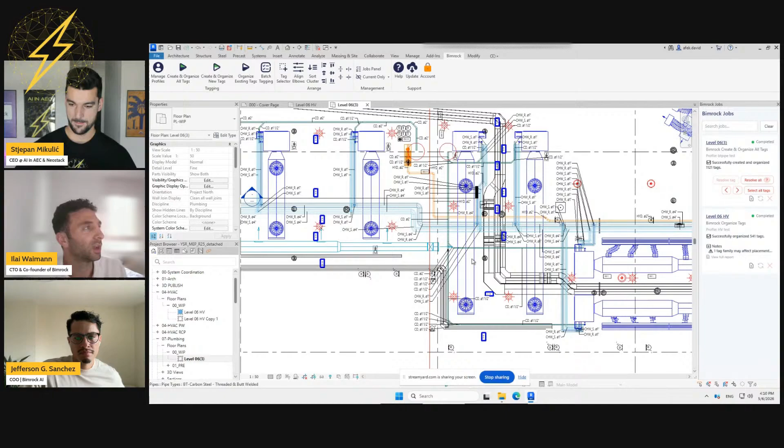So this is one floor that I just tagged now with AutoTag. This is 1,121 tags, and it took just over 2 minutes. And here's another floor also that I just tagged, a little tidier and with slightly more space here.

One thing to note here is that we have the duct tags, and we try to place the tags inside the ducts, for example, but if there's not enough space in the duct, we can sort of pull them out automatically.

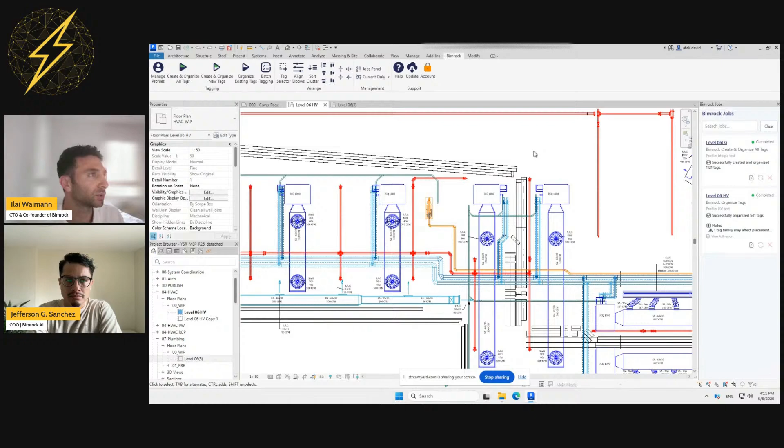Now if I just hit Control Z over here, the tags should jump back to where they were before this tagging job was run. I might have to hit Control Z again. Oh, there you go. Okay, now the tags will jump back to where they were.

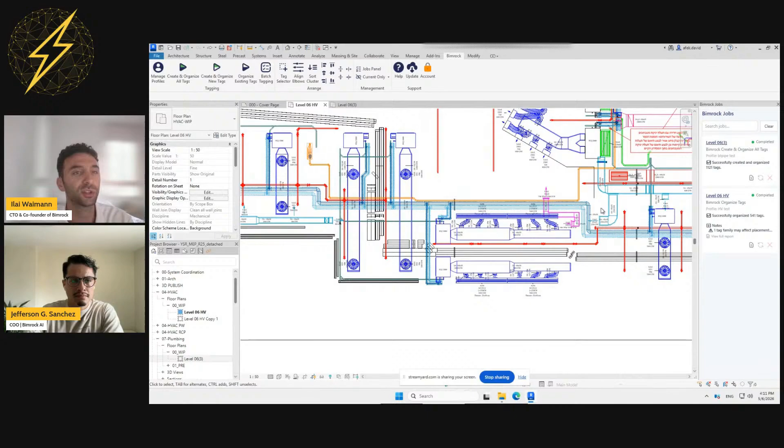I don't know if this is very familiar to some of the engineers or not, but what we see here is a lot of tags. Some of them, things move during the project, and tags and elements move around, so some are nicely placed by the engineer, and then you add some stuff, so maybe there are tags that are not as nicely placed, and some of them are overlapping.

This is a real project of some of our design partners, and we can see that some of the tags are overlapping each other. Some of them can't really be seen. So we're in this situation where we have a floor plan and a bunch of tags, and we want to improve their location.

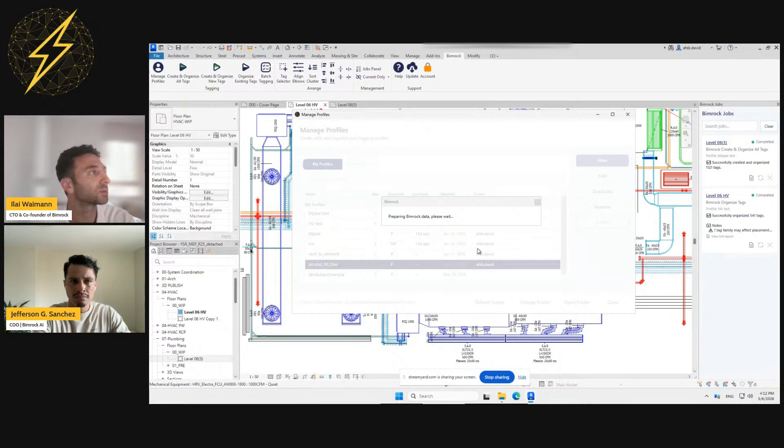So I go to manage profiles. Let's start here with this button, manage profiles. Here are some of the tests I did. If I just do new, we have this little interface, we can just click OK, but it's just to save some time. We only load things from the view, but we can load everything from the model as well. And we load the linked model too.

Now on the left we have all the tags. An important point to stress here: these are tags. If I click ducts, these are tags that are loaded within your model, the user's model in Revit—the user's own tags that are found.

Now we have a shortcut button here, add all tags from view. So what happens is we found there are 9 different tags in this view that the user, the MEP engineer, has already added. There may be a bit of a mess here, which this profile editor helps to sort of make clearer.

Why do we have 2 different duct tags? Maybe we only want this one that has 239 appearances. Maybe this is a mistake. So it also gives you a nice overall picture of what is going on in terms of tagging in this view that we just saw.

And we can already run this, but before we do, I can click one of these tags, and we have some extra filters we can apply. If I only want to tag, for example, Air Terminal—it's not so relevant. But if I go to the duct, we can decide to tag only horizontal elements, only vertical elements, or both—element types, system types, all specifically Revit things we pull directly out of your Revit model.

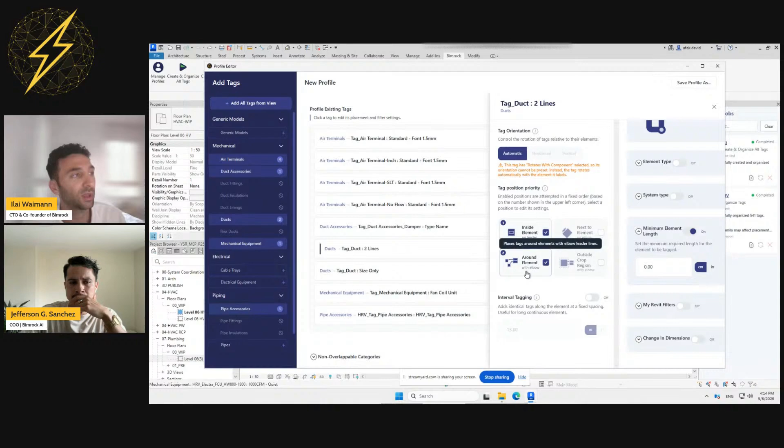And this is the main part here, inside element and then around element. So basically, we try to put the tag inside the duct. Usually ducts are large enough and they have enough space. But if there's not enough space, we pull it out, so it's not completely overlapping and hiding the duct itself. And so every one of these tags can have different settings.

We can also say, hey, I only want to tag ducts of a certain length. So it's a very powerful profile editor, which we can go into more depth perhaps later if there are more questions. But I can just save this for now. Just give it a name, HV test. Okay, yes, already exists. Fine.

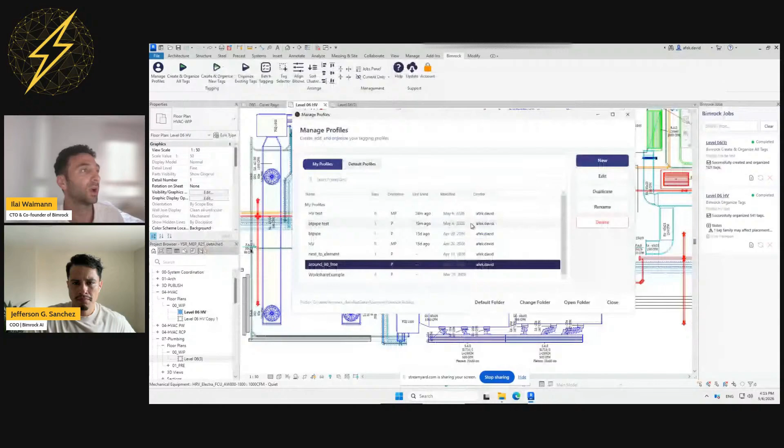Now I already have these existing tags, so we have these three AutoTag buttons. I'm going to click organize existing tags because I don't want to create tags yet. And I'll just hit it now. I just ran this earlier, so we can use the cache, which will make things slightly faster. Now it's going to run. I think it's going to take 1 minute. The server is already processing things. If there are any questions now while we're waiting, it's a good time.

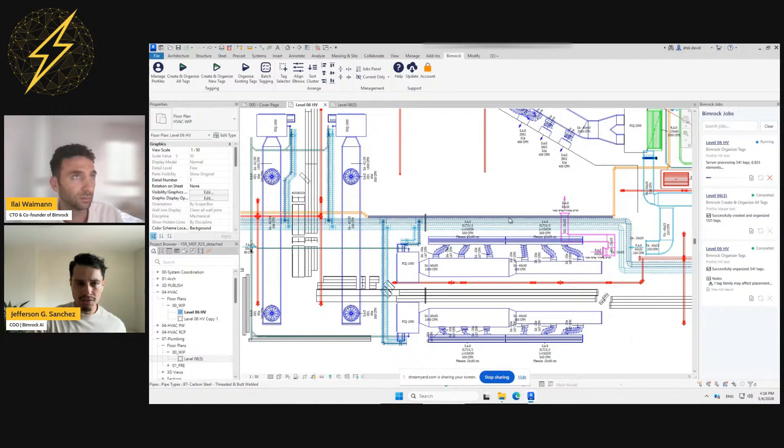Yeah, I think I'll just provide some context on the tagging tool itself. The biggest value that we've heard from our early design partners and our users is the ability to standardize your firm's profiles and logic for communicating information. At the end of the day, documentation sits at the end of the design phase for the MEP industry. It's where you're supposed to be handing off information downstream to either fabricators, teams on site, or even for internal review. And often when you use Revit's tag all button, it gives you tags, but they're all messy. They don't really follow any actual rules.

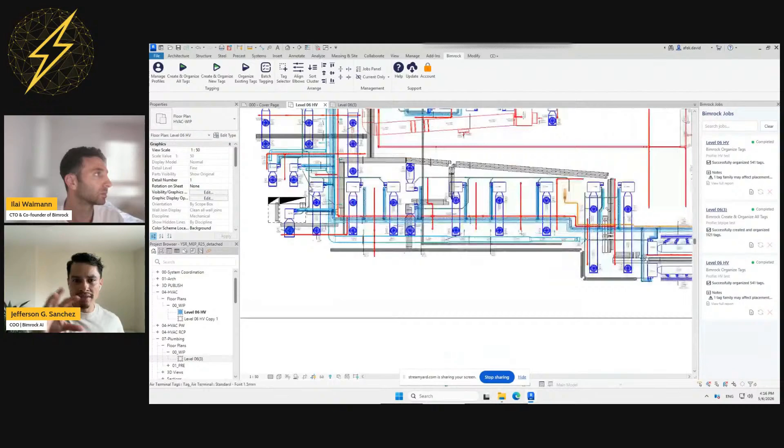And so the importance of being able to standardize and customize your profiles according to your own company's standards and have that be repeatable is where we come in. And so, yeah, I think that's just an important concept. You basically write the rule once, and that rule is applied to multiple views, multiple disciplines.

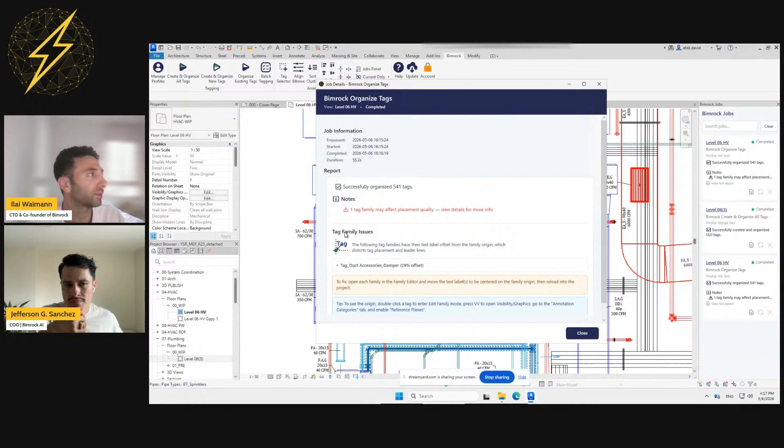Yeah. So the job just finished running. 541 tags, took just under a minute. Oh, we have this, which could be helpful: sometimes tags are not centered on their origin, which causes an offset with the leader lines. This tag is 29% offset, so you can actually find this tag and sort it out and reset it so it's straight, and its leaders are not all crooked. Now we can move on to this.

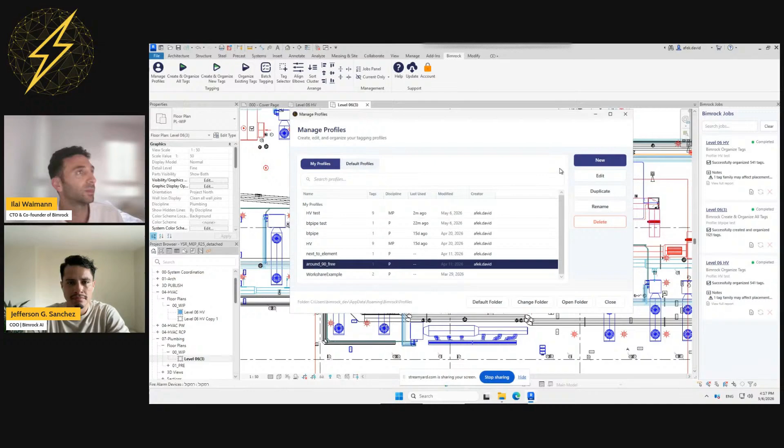Oh yeah, when I hit Control-Z, it just deleted all these tags. So say I'm starting fresh, and we have a floor plan now without any tags. So I go once again to Manage Profiles, and there are no tags on this floor. So if I do what I did before, add all tags from view, nothing happens. So instead, I'm going to go to Pipes. This is a plumbing plan, and I want to add one of these pipes, BT pipe, Imperial. Maybe I'll also add a pipe accessory.

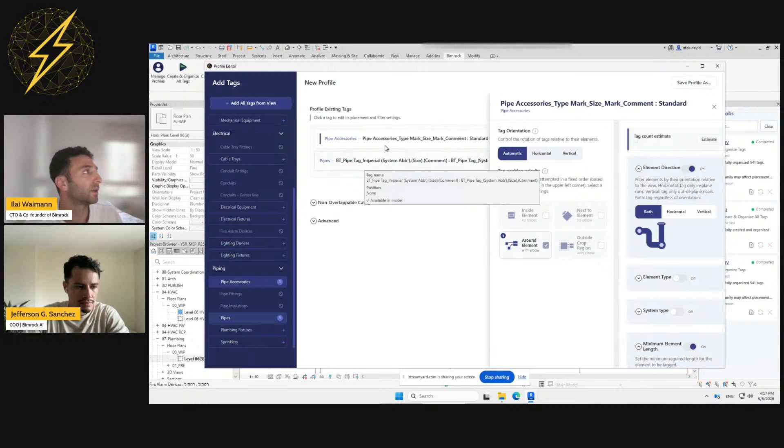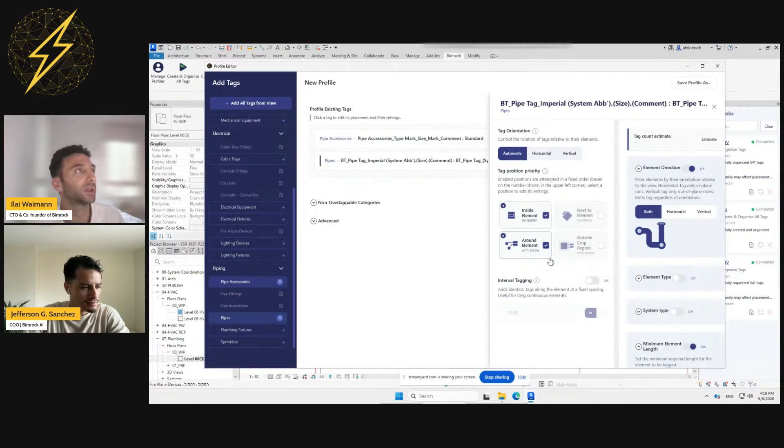Maybe for the pipe, I don't want it to tag every single pipe, maybe only pipes that are not too short. So let's start with 10 centimeters. We can also switch to inches. Now we try inside and then around, but with pipes, usually there is not enough space inside. Still, it doesn't really slow things down to keep both. I can just save profile as, call it BT pipe plus pipe accessory. Okay.

Now I'm going to hit create and organize all tags because we want to create new tags. These two will do basically the same thing, but this one is if I only want to move the newly created tags, and now we have no tags anyway. We could also use the cache just so it's slightly faster. Instead of 2 minutes, it should take 1 minute with the cache.

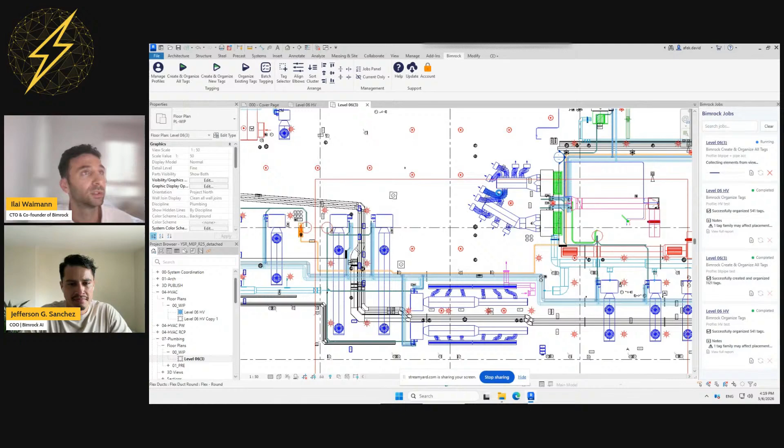Yeah, Jefferson, is there anything you want to say now?

Let's talk about the batch jobs. Let's say you've already understood how to create the profiles, and if there's any questions, we can go into more detail for all of the profile creation. But on the right side, you have the ability to batch create jobs. So it's not just one view. You can apply your logic to multiple different views and multiple different versions of what you want to present across multiple views. So as long as you queue up what you want tagged, it's this idea of being able to set it and forget it and go have a coffee or come back.

Notably, it doesn't slow down your activity in Revit. So while we have all of these automations happening in the back end, it doesn't actually slow down the work that you have in Revit. I don't know if Stjepan will eventually ask about data and processing and things like that, but there are some cool things that we are doing algorithmically to speed up the work that happens on the desktop so that we don't effectively clog up your compute for these batch jobs to happen. We can always go into those in more detail.

Yeah, we already have some questions. I see them popping up, so nice to see that as well.

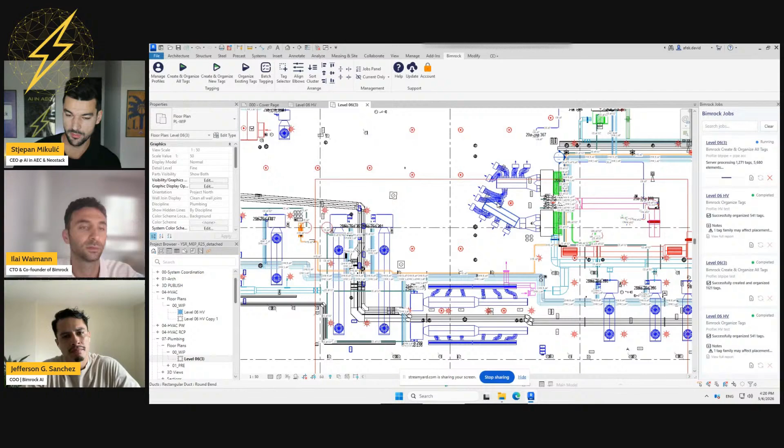I would start with the first question, because what I'm thinking of immediately is that Autodesk opened its Revit API to MCP servers and MCP connections recently. So, I know we're going to get to this question later, but don't get me wrong, why would I go with Bimrock to do this, and why wouldn't I try to do it myself with Claude or something through the MCP connection?

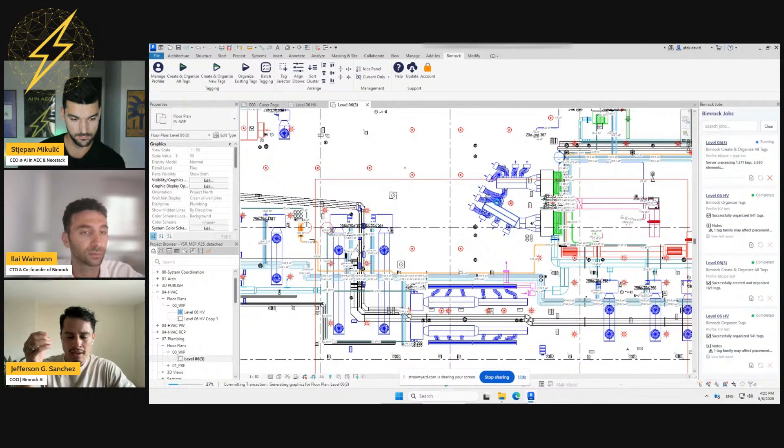Yeah, the answer that I have to that starts with an analogy. This is just personally how I see AI developing right now. When I was first experiencing CAD, this was probably mid 2000s, and spreadsheets in Excel, there was always this one guy in the office who had these really sick macros. This guy was the Excel wizard, and it was like, oh, can you send me your macro for pulling this information out and standardizing it?

That's the analogy I use right now: Claude and AI, generally speaking, increase the baseline of the tools that you can create, but we should distinguish between a commercially viable, enterprise safe, scalable, shareable tool as opposed to a macro. This isn't to discourage anyone from saying that you as an individual can probably create and understand the workflows given the Revit APIs, the open APIs we have now, and the MCP servers, but that is a very different category than a scalable, safe, private enterprise solution that you can download and share across a team of 500 people.

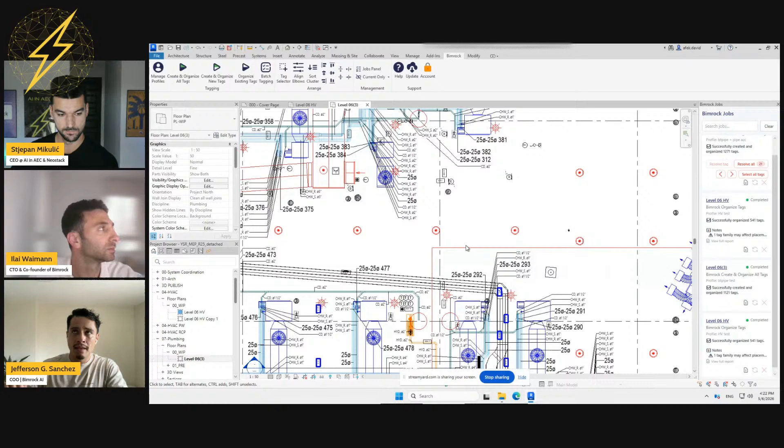So on one axis is the scalability. On another axis, it's the security that we provide. And the third angle is the customization, or the level of sophistication that we've built into this tool, that it's not simply a Revit MCP server. We have pretty sophisticated infrastructure that allows us to not slow down your computer. The fact that you can run this tag and it literally does not slow down your activity in Revit is an infrastructure choice.

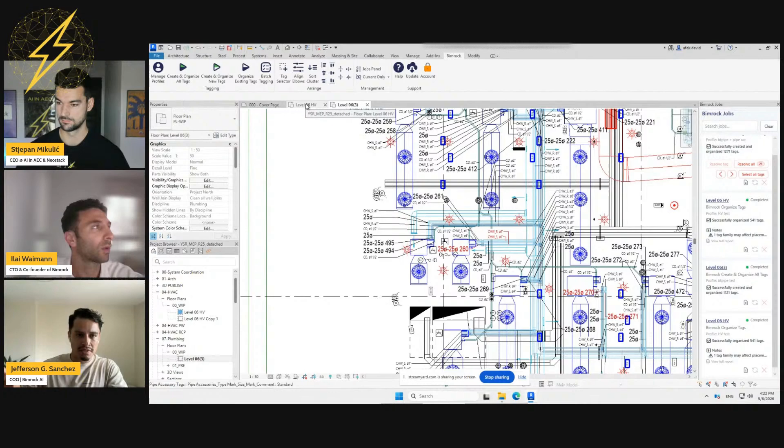So there are these different aspects that individually might be replicable using Cursor or Claude. I do this vibe coding stuff all the time, but that's very different from having an enterprise ready, secure, and scalable tool.

Okay, that's a really good answer. I fully agree, because while, as you said, the baseline moved, there's always going to be this techie person in the office who's going to be testing that, and maybe they can get something to work. But to make it scalable, stable, secure, that's still a big jump from a personal test to something that's actually working at scale.

Yeah. And we've seen the archetypes where the hacker engineer works for a team of a certain scale. So if you're a freelancer and you run your own firm and you notice the bottlenecks, but maybe your trade-off is how much time or resources, maybe you don't have the money to buy an enterprise solution, the risk reward of building it internally versus buying it makes sense for you.

But when you're an enterprise company, and maybe it's your top engineer or designer that knows the firm standards, that knows how things should and should not be tagged, that has the influence and perspective to motivate and teach other people, is their highest impact in learning to use Claude, and then learning to make this enterprise safe, and then to make it scalable, and to make it so that it doesn't slow down Revit?

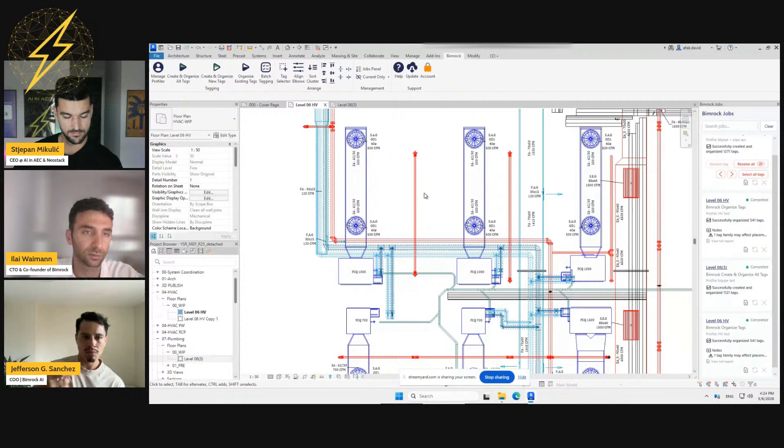It's just the risk reward or the value curve looks very differently. So then rather than taking your highest paid engineer and shifting them to vibe code a tool, that just isn't realistic. So there's always a spectrum, and I think Claude Code and these agent tools are better for the smaller scale, the individual freelancer who has a very niche workflow that they're particularly annoyed about and want to replace. But then that very quickly falls off as you start taking into account a bunch of other considerations of large scale companies. I agree.

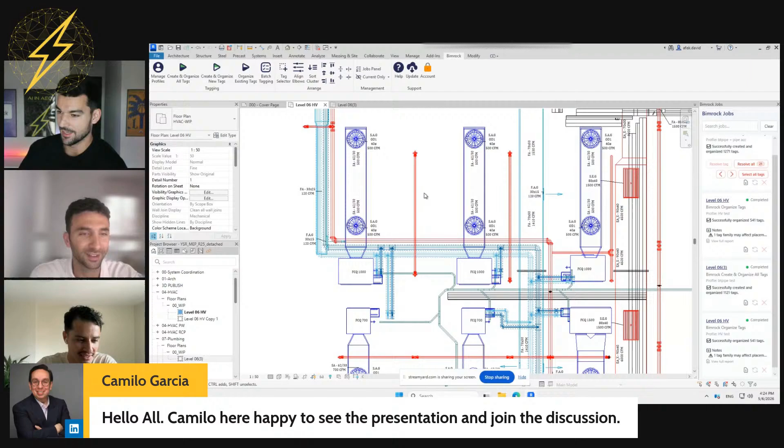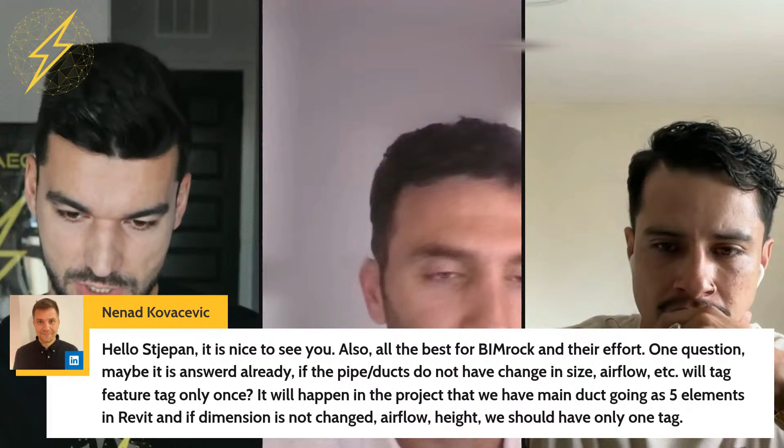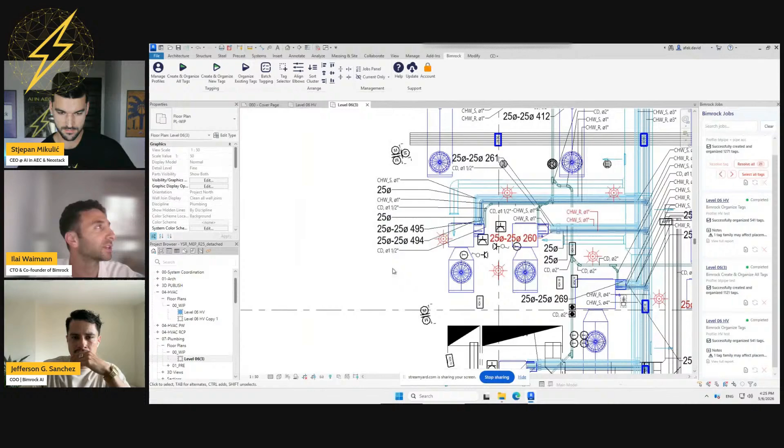Question: if the pipe and ducts do not change in size and airflow, etc., will the tag feature tag only once, or will it happen in the project? Yeah. First of all, go into that tool, go in the profile. This result is a bit funky because I didn't realize we had two very different styles of tags, so it came out a bit weird. But what we do, we cluster the tags. To answer your question, what we have in our profile editor are some filters. Say let's add these tags, but this pipe accessory tag was just.

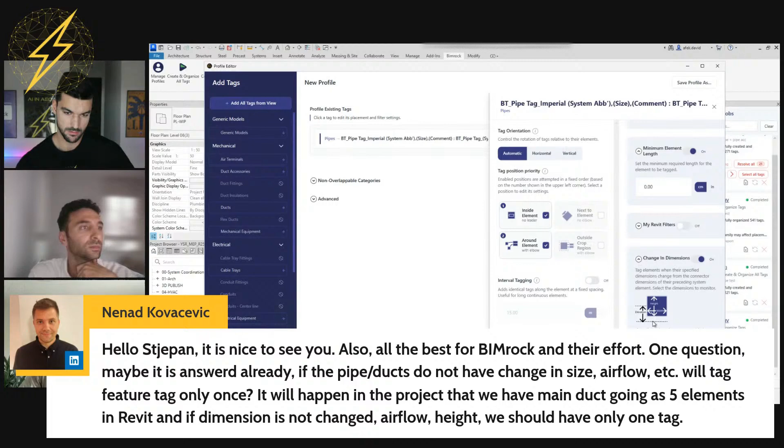I'll rephrase the question slightly if it was unclear. They were trying to ask, for a particular element, let's say it's a pipe, there's this case where properties associated to that element may or may not change. One of those could be diameter, length, material, system type, or even a curve. We know this is a recurring challenge where you want to communicate a significant system change, but not do that manually. So we break down that system change into the different categories and filters that you're able to apply for that systems change repeatedly across instances in a particular view.

So if a pipe changes from 8 centimeters to 10 centimeters, you want to be able to filter for that specific system change. Those are all expressed as customizable filters, and that's what Ilai is going through. So if things change significantly and you want to express that as a significant change, do you have that? And yes, we do. And the opposite of that: if the system doesn't change, you don't want the same tag on that view 20 to 30 different times. So we also have the inverse, where you can standardize only on the first significant change, or variables of that, like every 25 feet or every 30 feet or some length, so that logic for the repetition is ingrained in this.

Yeah. So we have different filters for different elements. If it's a duct, this is a rectangular duct. It has width, height, and elevation. For the pipes, it detects that this pipe is round, so this little icon is not relevant here, but it has a change in diameter if we want. So if I do change in diameter for the pipe, and for the duct maybe change in width, change in height, or change in elevation. All these could trigger if one of these happens, so we get a new tag.

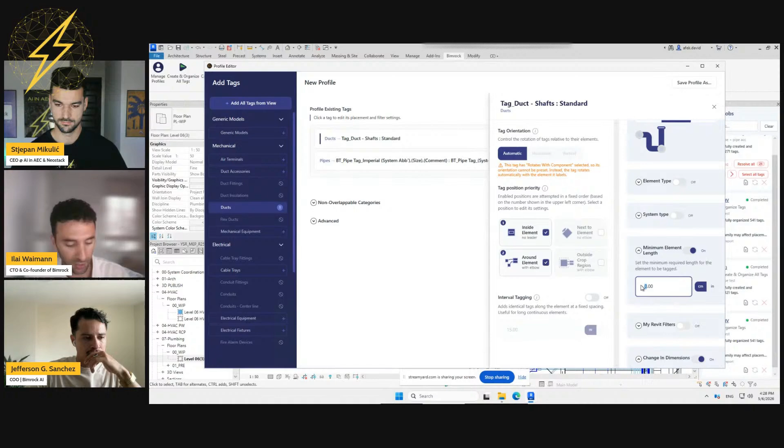And say I also want to only do horizontal ducts, only of a certain length of 10 centimeters and more, and maybe the same for the pipes, 10 centimeters. Usually I think they like it longer than that. Let's call it test demo.

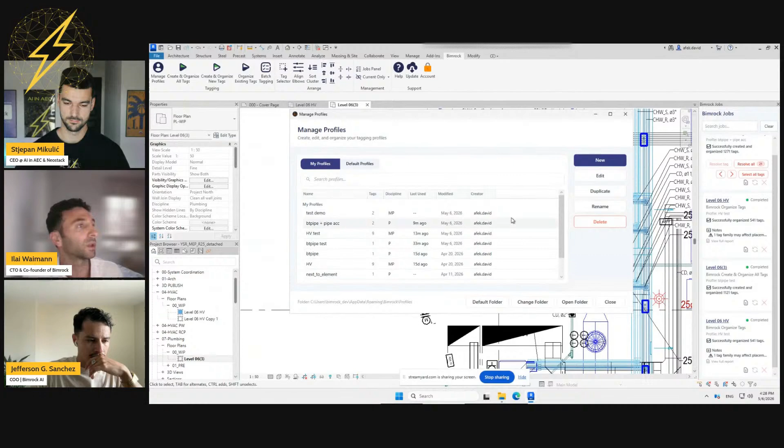Okay, now close this up. If I hit Control Z twice, the first time will just bring the tags back to where they were before we ran AutoTag. So you can always recover your work. Then the second Control Z will remove the tags because we created all these tags earlier. And now I'll run the profile again. Test demo. Let's use the cache for speed.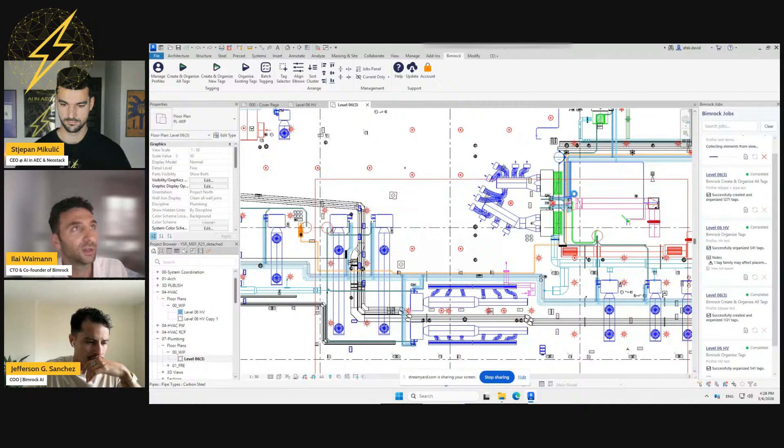Yeah, and now it should. And while we wait, maybe we can cover another thing as well. Yeah, I see the questions popping up already. Nena is also saying great and bravo.

Okay, yes, we have Nirvan here. It says LinkedIn user on the live call, but I know it's Nirvan. I was checking the LinkedIn as well. Does this tag, AutoTag, share a total quantity count for equipment? Do you work with HVAC distributors, and their biggest time sink is doing takeoffs?

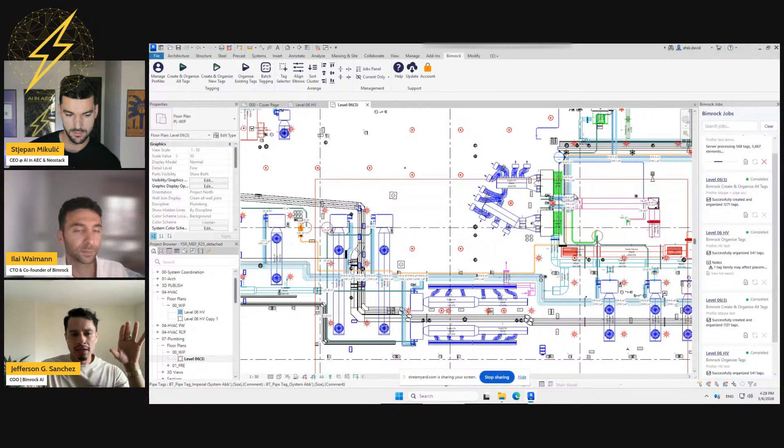So I'll take this question, because his question is implying if we serve a different type of ICP or a different use case. So I'll frame it by saying Bimrock right now is effectively a tool for a BIM designer, engineer, modeler, someone working at a consultancy, consulting engineer, a specialty contractor, or an internal BIM team at a large general contractor.

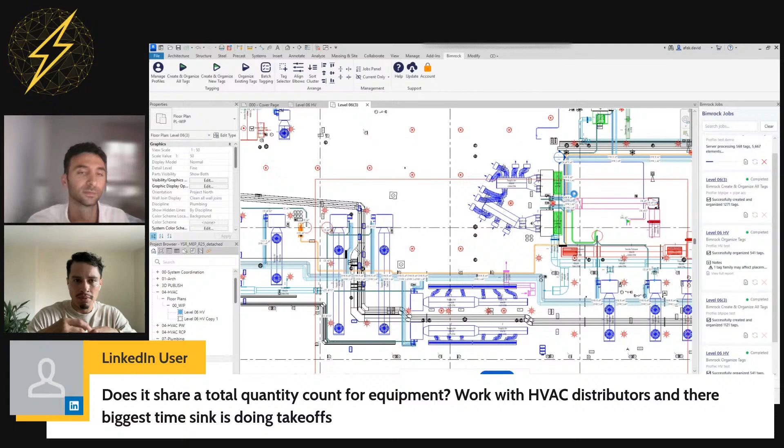We do not currently serve nor plan to serve distributors or folks in the extended supply chain. Even if the overlap of the problem is similar, we're very much focused on the workflows for the MEP designers, modelers, and engineers. So as an aside, does that mean some of these elements might be useful for other people? Yes, but we're not explicitly supporting them on our roadmap.

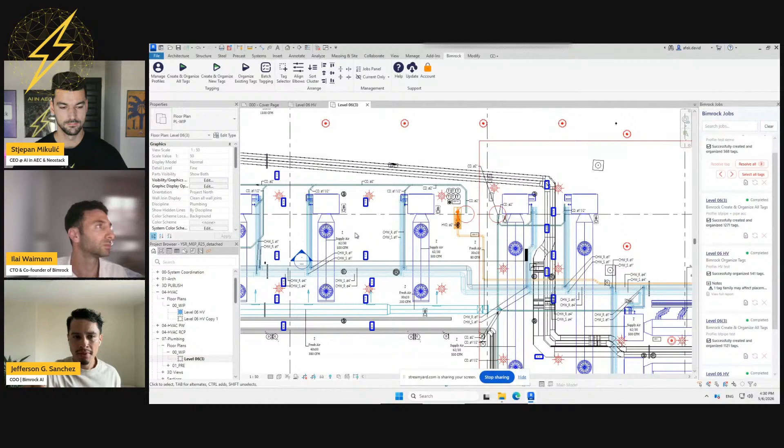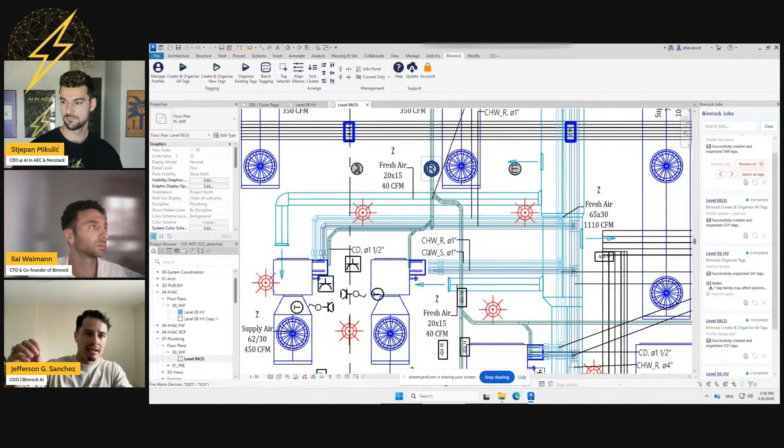So the ability to count tags or count numbers of things is a feature we have, because when you tag something in Revit, the logic behind it asks what type of thing you are tagging, and based on that type, how many instances of that thing you have. And we have a running list, because we need to feed it to the algorithms to say these are the tags that correspond to this Revit element type, and then position them in the white space on the model. So we have it implicitly, but it's not an explicit feature for fabricators or people in the supply chain to help with the takeoff process.

That being said, we can create a template where it specifically tags a specific element that is maybe useful for that distributor or person in the supply chain. Like you only want to tag the SKU, if that's a property you have in the Revit model, for particular HVAC diffusers, so that when you look at that plan, you only see the diffusers that match this logic and that SKU, which makes it easier for you to count.

But we don't take that a step further and say, here is a deduplicated single unified list of the schedule for that particular HVAC diffuser, so you can go look in your inventory and map that. That slightly extends the workflow of the customer we're looking to focus on. Nice, thank you.

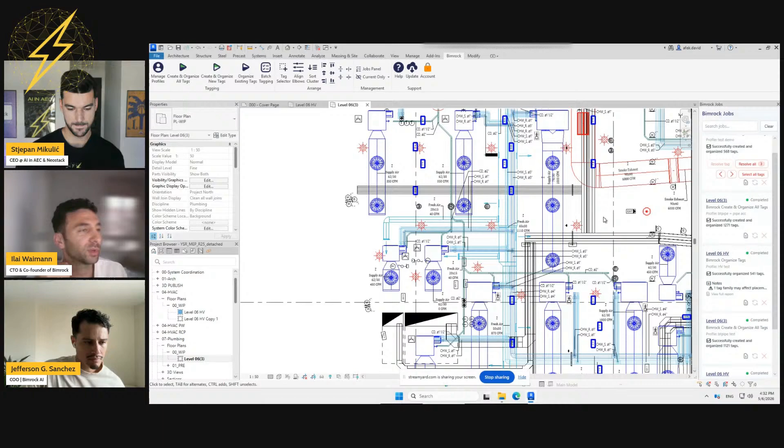Yeah, so here are some results. We can see there are a lot fewer tags because we applied these filters, which are very good to use, because then you have a clearer picture of what's going on. You have fewer tags, so they are less in the way of one another. And this is basically the result. It is never perfect, but what we try to do is find the white spaces that are closest to the elements and place the tags there.

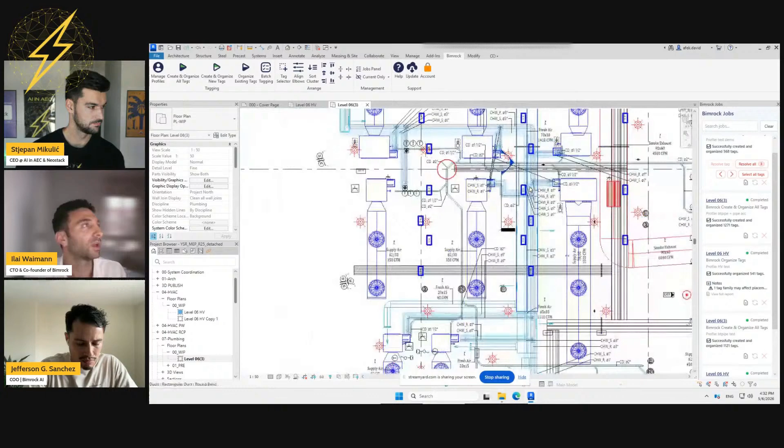Sometimes in groups. This is a cluster of tags, if the elements they tag are close together. This one jumped quite far away, which is a shame, but sometimes it's difficult with all the things going on, and it tries to find the best result and give you a good head start for the project.

Okay, nice. Yeah, you guys tell me, what should we do? Do you want to continue if you have more things to show, or continue with questions? Yeah, Ilai, you kind of run. I can show one thing.

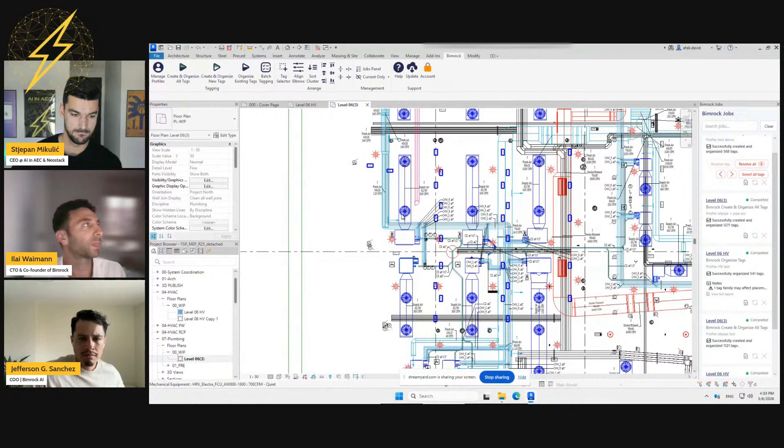Jefferson mentioned the batch tagging, where if you have a lot of profiles, or one profile you want to run on many different views, you can have this sort of shortcut. And another thing is this sort cluster button.

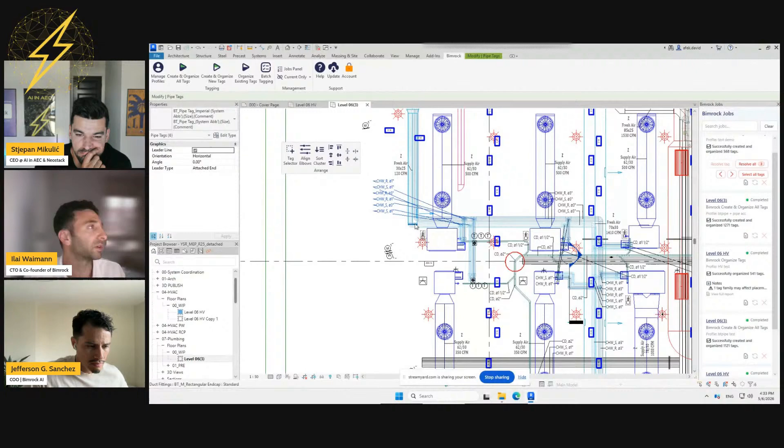So if I have this cluster of tags and I just grab them, it's actually easier if we pull these buttons down, and I can do tag selector also. So it just selects the tags. Then I want to have them here, for example. I think it's better if they're here. So then I can hit sort cluster, and nice. It switches the order. It's a fast, easy tool to use.

Then you also have align elbows, and if I want to align the elbows, maybe space out the tags a little bit. Maybe also add this guy to the cluster, and then hit sort cluster again. Space it out. I don't know. Align left. By the way, align left, align right. These tools have been added, I think in Revit 2026 now. You can work with these, but before that, these are helpful.

This is really cool. But maybe because we're also waiting on Revit right now, there was a question from Cassandra here. What happens if Revit freezes or crashes during the tagging process? Does this cause an issue with the plugin? Does the process start from the beginning again upon restart?

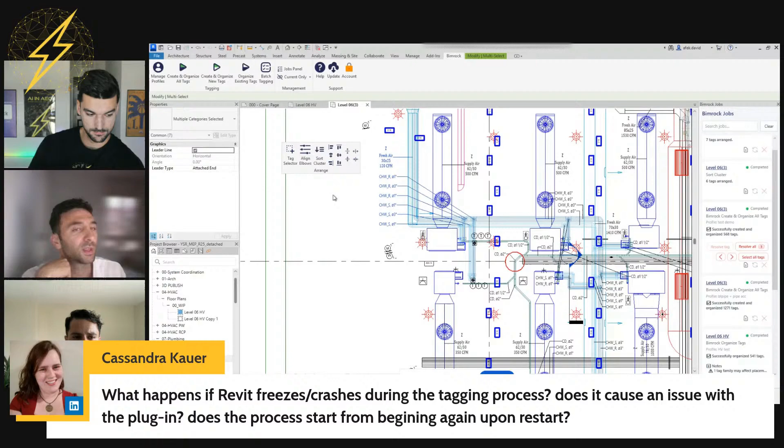Yeah, you'd have to run the program again, because we put a lot of effort into making sure that we don't crash Revit, right? That is the worst thing to do, and obviously we put in a lot of safeguards around our own software so that we do not interfere with a lot of very basic things Revit does. But if Revit crashes for some other reason, or you close Revit before the job is done, the job is lost because the request returns from the server, but it doesn't find the client. So you just have to run it again, but it's no big deal.

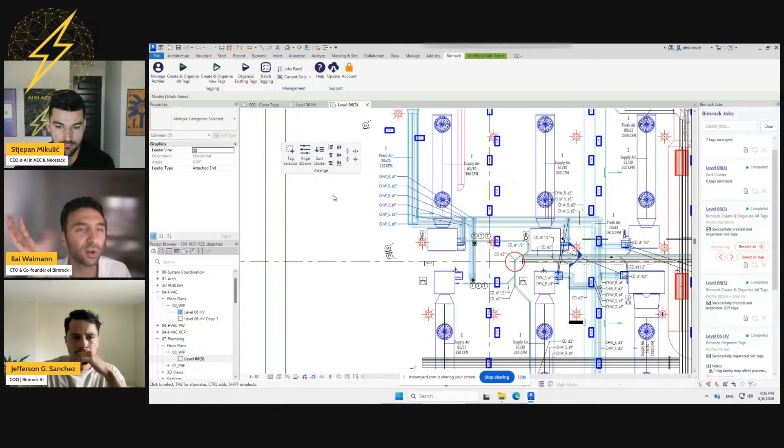You won't be in a situation where something is stuck or frozen because it's waiting for a job to come. We just say, okay, the job did not arrive. There's a timeout, and it's fine.

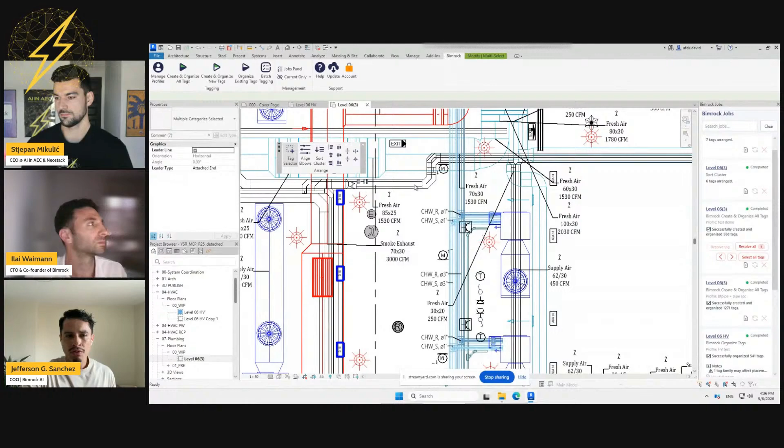Yeah, maybe tying it specifically to the pain point or the use case of someone who'd be like, oh my God, I pressed the button, I expected it to be done, and I came back and it didn't happen. So within the range of actual possibilities, if you're running a single job or a smaller job, it's on the order of 0 to 1 or 2 minutes. So if something crashes, it's as simple as pressing the button to run the automation again. But because you already have the profile logic set, you're not redoing anything other than pressing a button to run the job again. So in 90% of the use cases, the downtime is going to be waiting another 2 minutes.

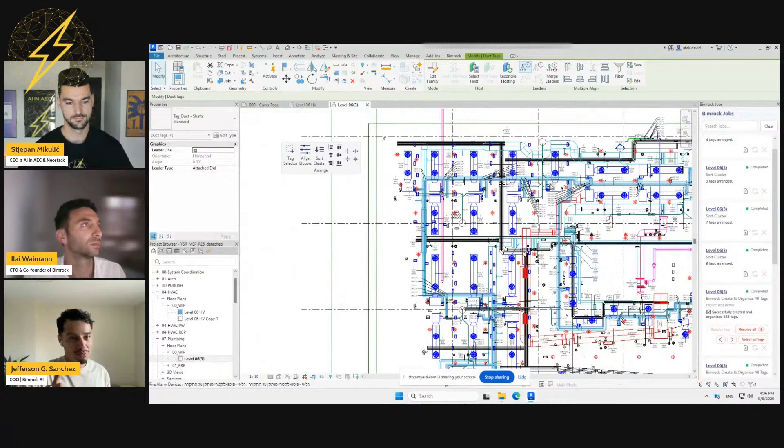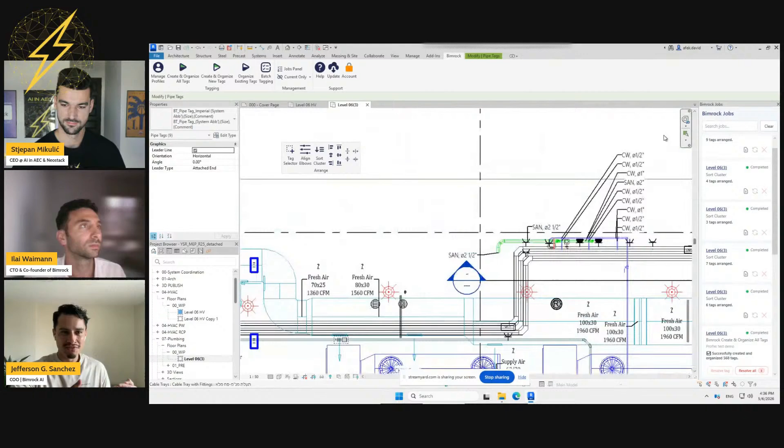Or actually, let me not say waiting another 2 minutes, because Revit just loading in and of itself, at least on my personal computer, takes like 20 minutes sometimes to fully load the model and everything. So the minimum time will be as long as it takes for you to reload Revit and then press the button and then wait 2 minutes. So the time that you wait to run the Bimrock job for the tagging relative to spinning up Revit itself is minimal. It's like 1 minute of waiting versus 20 minutes of waiting for Revit to reload.

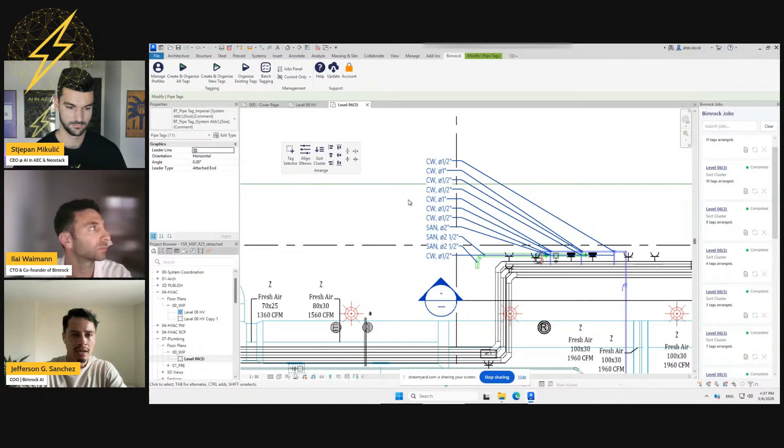But technically speaking, we do not share or cache the job for it to continue, because the trade-off is you press the button again, and in 90% of the use cases, it'll take between 0 to 2 minutes. If you were to queue a large series of jobs that could, in theory, take 10, 20, 30 minutes or longer, that's a particular use case where you'd want to make sure your computer's plugged in, the internet's stable and all of these things, because yes, that would be more frustrating when you've queued up all the jobs and something outside of your control crashes Revit, but it's not within our own system that's causing that issue. Okay, fair enough.

There was also a question about these background tasks from Jack, asking how do tasks running in the background not affect the performance of Revit, or do they? And can the jobs be moved from project to project? It's a good question, because we actually do affect the performance of Revit. The thing is, we try to affect it the least amount possible. So we have to take out the tag shapes and this view.

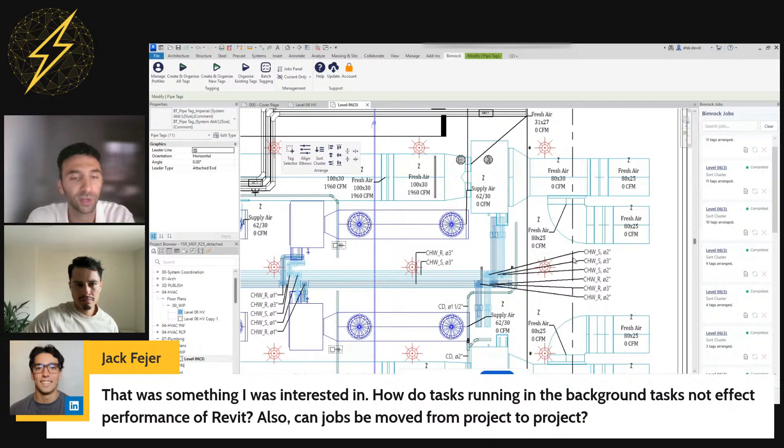We don't take any three-dimensional data or any more sensitive data, just like the two-dimensional image we have here. We have to take that out of Revit, and that's what makes the mouse turn into a blue circle, and Revit is sort of stuck for a bit. That definitely happens once the server is working. Revit is released until the tag information of where to move them comes back, and then we move the tags, and Revit is stuck again for like 3 seconds, depending on your computer. Mine isn't very good, so it could be a little longer. But yeah, we definitely do hold up Revit at certain points when we're taking out information.

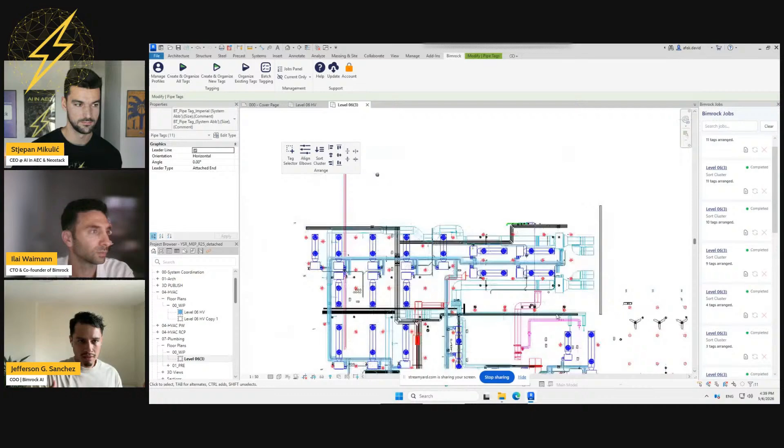Qualifying the answer: do we technically impact Revit? Technically speaking, yes, but in the grand scheme of the performance of a user to continue their workflows and still being effective within Revit, the qualitative answer is no. Technically, we take information in that moment where we're drawing from Revit, like getting the tag metadata, and that does clog it up. But our algorithms and the compute happen outside the Revit ecosystem, outside your local computer, on our servers, to free up compute locally. It's not like this runs on your computer within your Revit instance and freezes all your work during that 1 to 2 minute, or even 3 minute or longer, job.

Nice, yes, all right, cool. Please go on, Ilai, if you have a... Yeah, one little point here.

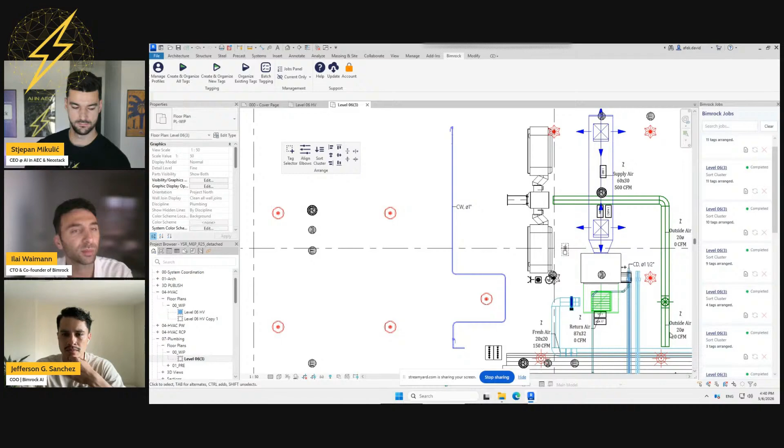There was a question about filters that came up. Sometimes it's not really clear to understand when a tag was supposed to come up, or whether something changed. So in this pipe, we can see the pipe keeps the same diameter, so there was only one tag placed here even though we have a few pipes. This is just showcasing that filter we were using earlier.

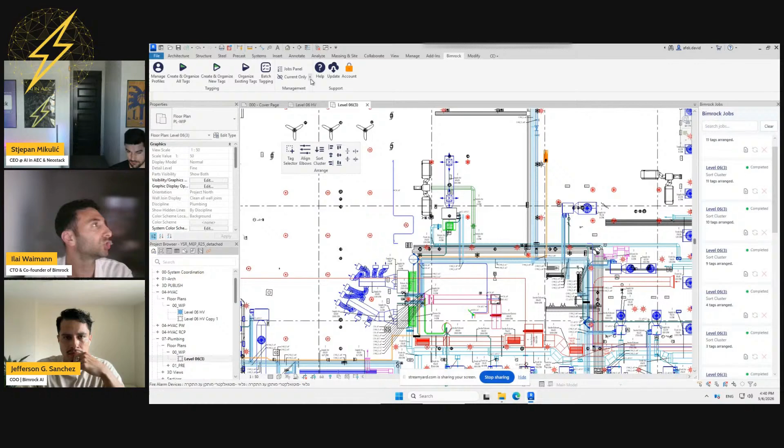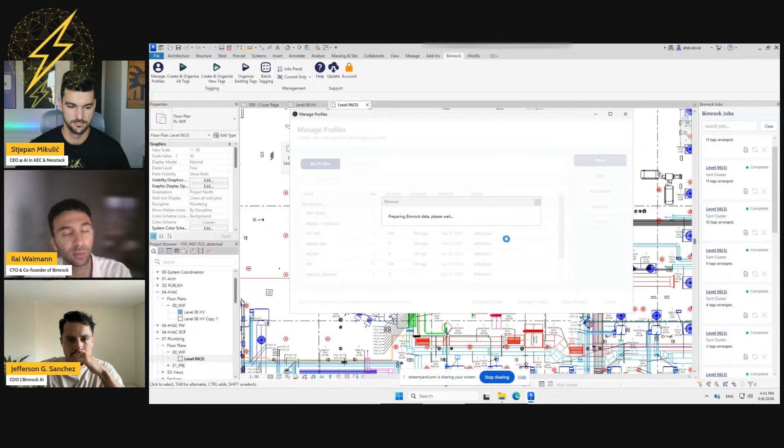So we went over these different tools. You could also choose whether you want to tag linked elements or only current elements that are not linked. The default, I think, is current only, but there's no issue tagging linked elements, and that's only what we tag. Regarding what we actually overlap with, we always consider the links because obviously they are visible. But you do have an option for certain categories to be overlappable. So if, for example, the architectural stuff is visible but gray and not very visible, you can say you don't want your tags to avoid the architectural stuff, because then they won't find a good place to be. You can untick architecture, or whatever category, like structural, and this allows the tags to be on top of walls and so on if they're not very visible in gray, which is the case in a lot of MEP floor plans. Then it's much easier for us to find where to put the tags. But this applies to linked and unlinked alike - there's no difference in overlap between links and non-linked elements.

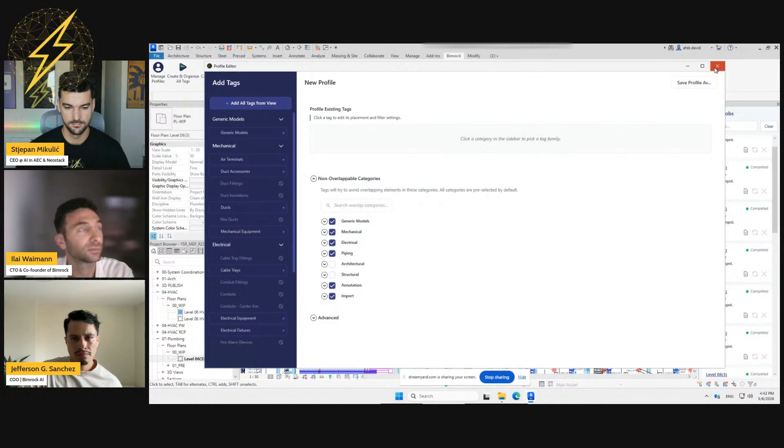Okay, awesome, thank you so much for showing us this. I see that you're looking at so many details and settings, which I really appreciate. And Neda has another question: is there an option to skip tagging elements shorter than, for example, 500 millimeters? Usually we don't need tags for these since there are many small elements in the project.

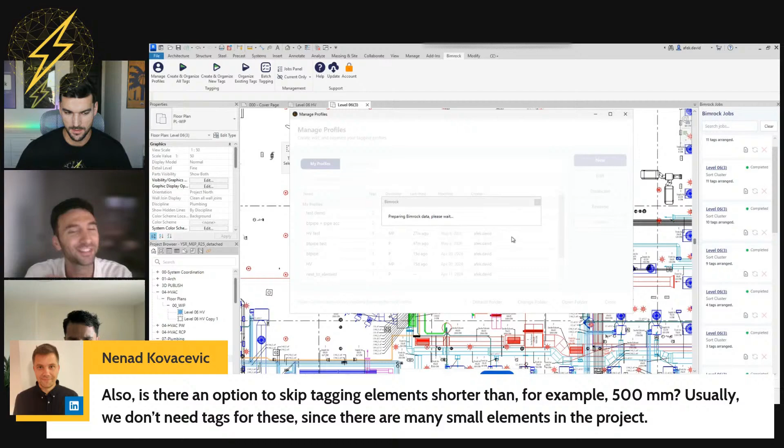Yeah, great question because I have an answer. So if we add our tags, one of the filters here is minimum element length. I can showcase one of our features - if we click estimate, it tries to count how many new duct tags there will be if we tagged and created new tags. Okay, more or less 290. It's not precise, but if I then set it to 500 millimeters, 50 centimeters, and go back and estimate to see if it works - okay, duct elements passing filters: 176.

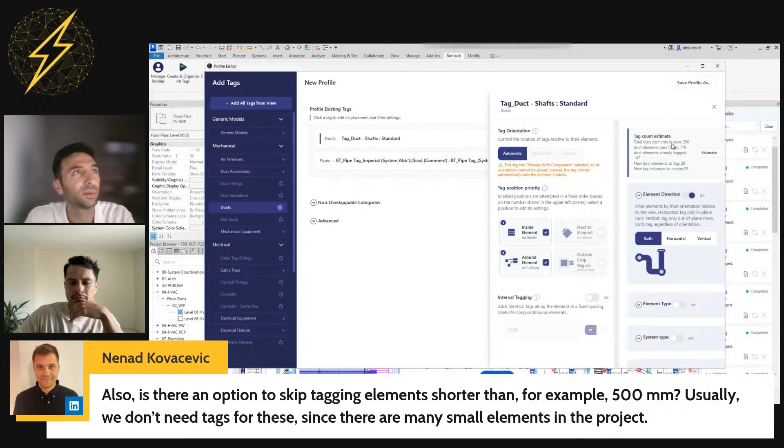So now I can see, it tells me we already have 147 tagged. Without this filter, we would tag 290 maximum. With the filter, 176. So you can get more of a rough idea of how many elements would be tagged, but it's not very easy. We don't really know the exact number until we run the algorithm, because if you have change in dimension on as well as minimum element length on, we will always tag if there's a conflict between them. You tag the element obviously, but the estimate is not always 100% known before you actually run the job.

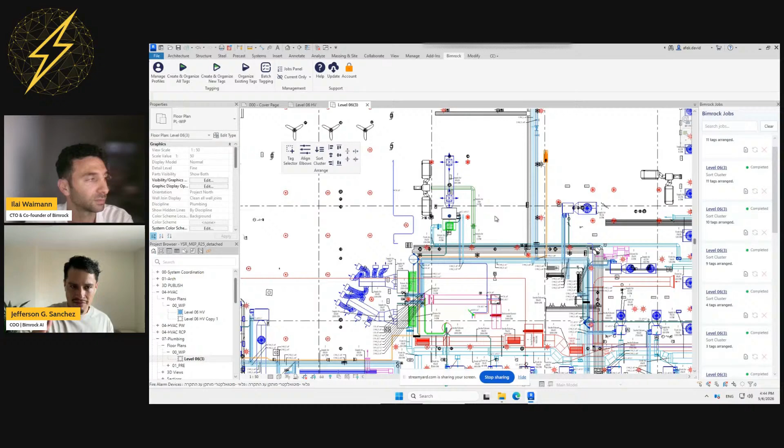I think one general statement to address the point is that when we're designing, AutoTag is its own current commercially available tool, and we have other tools in development as part of the platform. But what's important to underline is the philosophy. We're not a black box automation that produces all these results without fine tuning. It's almost the opposite. The reason we are so detail oriented is because at the end of the day, we're simply a tool that allows the engineer or designer to come in and express their judgment at any level of granularity. We are detail oriented because we have to be. This is a product for engineers and designers who are themselves detail oriented. So even though we have automations to streamline the workflows, every automation, every piece of logic, every filter is something that is always overridable, customizable, selectable, and the software UI/UX expresses that.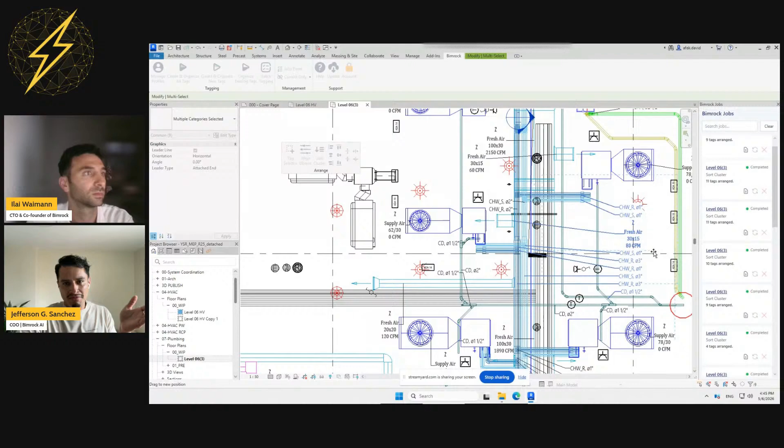Maybe it'll take a couple more clicks in some cases versus another, but for example, in this case you have the ability to have change in orientation plus dimensions over or under a particular length. Those are two types of logic that are both customizable in any fashion, right? So just want to highlight that it's not black box automation. It's tools with rules that you can change and edit to your firm's standards.

No, I love the level of customization you can get into. This is awesome, because you thought about it in a really good way when it comes to hierarchy of things. You went from, hey, this is a simple add-in for Revit, to something where you can have this profile and that profile, this size and that size, and you can stack jobs on top of each other and so on. So I think you really thought about it well in terms of hierarchy and how to do stuff.

Yeah, it wasn't easy, Stjepan. It wasn't easy, I'll tell you something. We realized at some point that AutoTag, this tool, if it's like 80% good, it's not enough, because if you don't do the job properly, and it's still not 100%... But 80%, 90% is not good enough, because then people say, okay, I can't trust this tool, I just have to do it manually. So we're always trying to improve it, to have the location of the tags as good as possible, and all the filters that can possibly be used. And we're always happy to hear improvements, because we really want this to be useful and for people to enjoy using it.

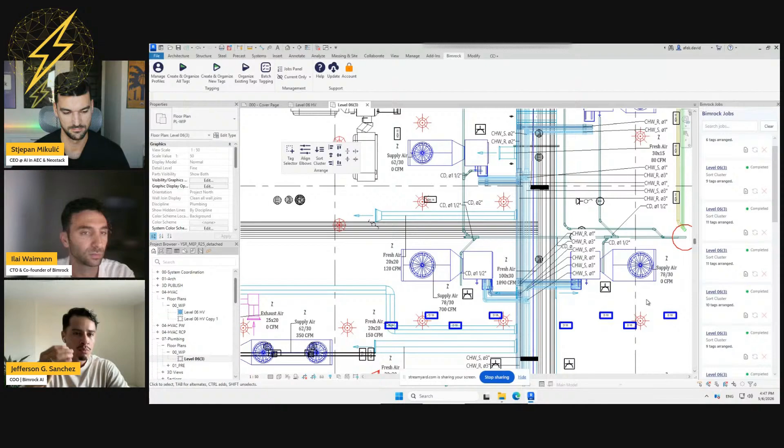If I were to tell Claude, hey, shift the text to the top left of the image, it will, because it doesn't necessarily have every piece of information as a discrete variable to reason, it can hallucinate, and the hallucination in this case is just creating a result that isn't the one you intended, because you as the human expressed some version of what you thought you had in your mind with the geometric placement.

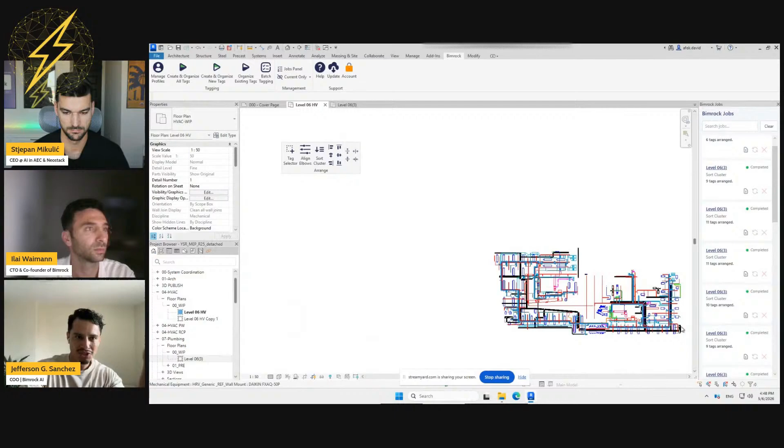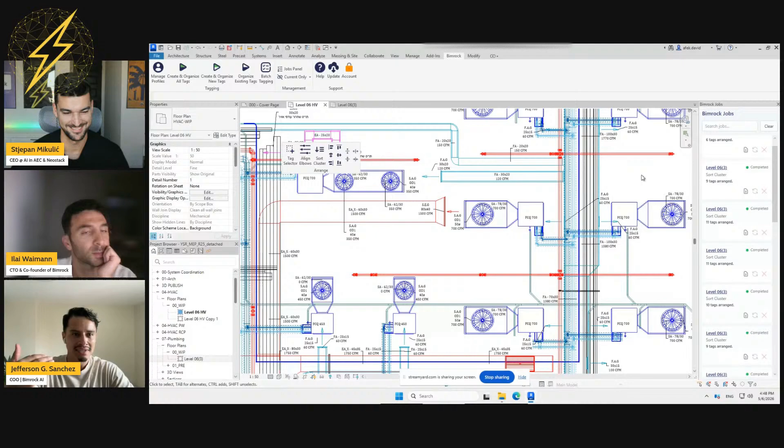So it ties back to originally, why can't you just do this in an MCP server? It's because the MCP server doesn't necessarily have the discrete layers of rules that build upon each other for you as the human to trust that your outcome is based on these discrete set of rules that you've customized. So yes, you can go say, hey Claude, put all the tags in the middle of the ducts. Good luck, because you're very likely to still have to clean up 30. Yeah, it will work one day, but we're not there yet.

And people are still struggling with a lot of work in Revit, and this is typical with AI these days. You can get somewhere, but maybe it's only getting you 50% of the way, maybe 60% of the way, and you're like, I can't really trust it. Let me do it manually.

So speaking about trust, I'm actually super interested in what's the actual AI part of your app, and what's the automations and algorithms that work in logic compared to AI?

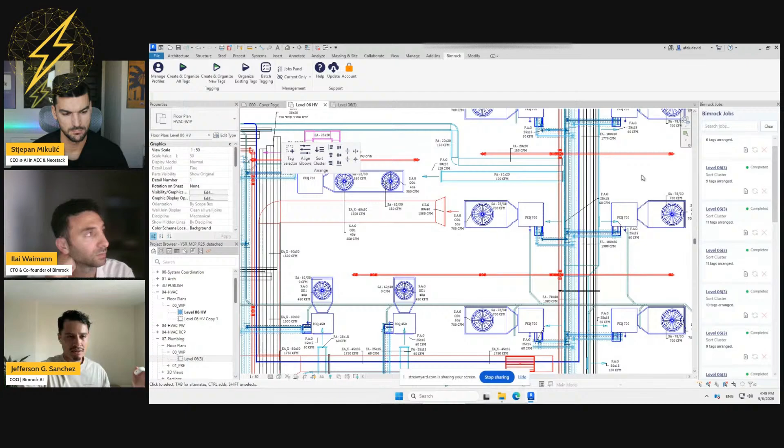Yeah, so technically speaking, this is a series of discrete rules. There's a large spectrum of what is AI and what is automation. You can position this as intelligent automations, but we're not using commercial AI in the sense that the general consumer is accustomed to thinking of AI. We're not an LLM like Claude or ChatGPT where you chat to it and it does the intent, but you can think of it as intelligent automation because we're a series of discrete rules that build on top of each other.

So auto tagging as a tool in itself, we wouldn't want to position as an AI native tool. It does have a series of rules and algorithms that use complex computation, but the future roadmap, or some of the tools we actually have in beta development, use the input or information we're able to infer from these plans into true AI automations.

But it's important to structure it as, there's AI for space, there's AI for language and text, and there's AI for physics - three different domains. When you think of AI, people ask, do you do AI? I'm like, well, do you mean LLMs? We're not an LLM and we're not a foundational model for LLMs, but we do use LLMs to classify and put things into buckets that are text. Then we have a separate series of what you call AI, which is machine learning algorithms to route something from A to B throughout space intelligently. And there's another set of AI where it's physics-based constrained equations to maximize something, so when you have heating and cooling loads, you've modeled it and it's generative. So are we AI? Yes, but with a very big asterisk depending on what it is you're talking about.

And in this particular case for AutoTag, it's more appropriate to say we're a series of discrete rules that runs through an automation loop.

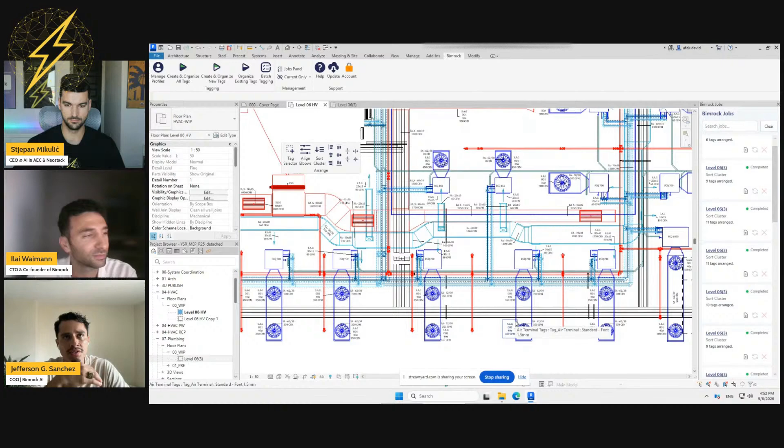I think the category statement that we have, or the philosophy behind how we approach data and generally training, is we only take as much information as we need to deliver the function or the feature or the value that we're promoting in this case. So right now, we're basically organizing tags in white space. You define the rules for what is the allowable white space for those tags to be placed in. And in order to do that, we need that information.

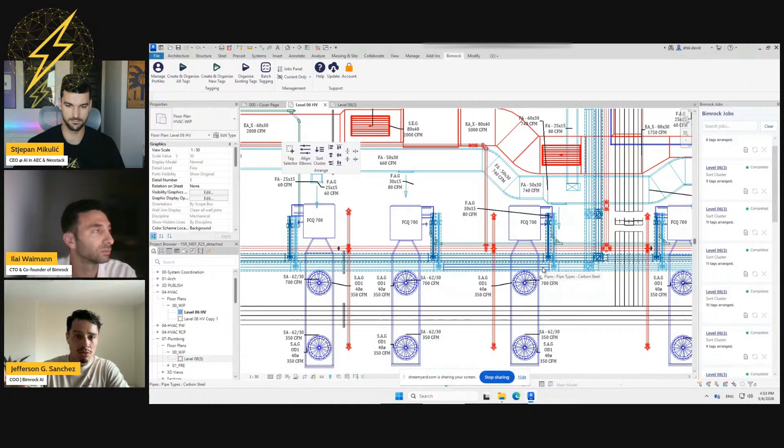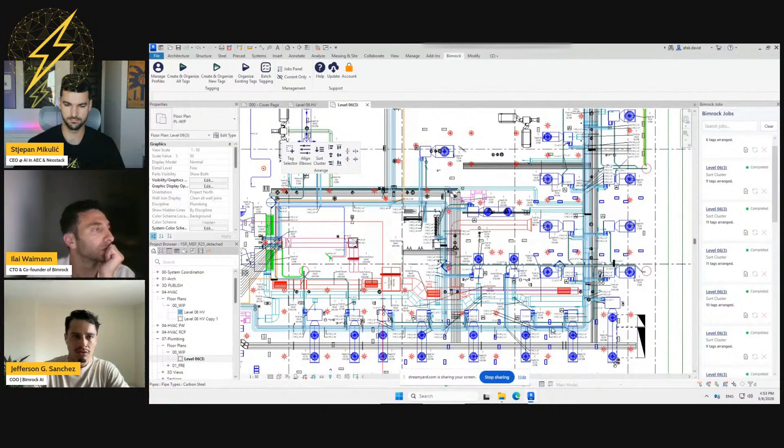So an example of the data to calculate that white space is the distance between the edge of a line on, let's say that HVAC unit there, and the space between another line or another element. So we have the white space, or the shadow, that marks out the allowable space for our algorithms to place your tags. But we do not look at the 3D model or the Revit model itself and train on that.

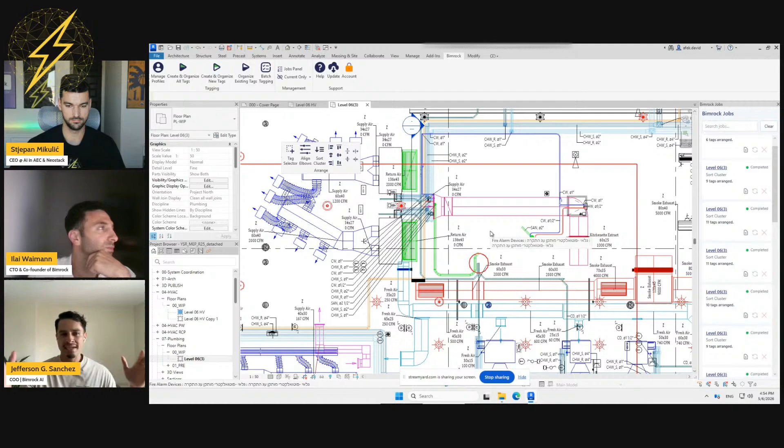That doesn't mean that we don't learn or that we don't have a framework in which we can learn, but we are choosing to express that as a series of discrete rules where you as the firm can either customize it and establish that as a rule, or for enterprise partners who are looking to create a new view. We've had this conversation with a company in the Nordics where Nordic tagging is like, if you're familiar with Swiss design, the most elegant, timeless version of architecture, magazines, and art. They basically take that same philosophy and apply it to the documentation.

So documentation in the Nordics literally looks like a piece of art. That's the way that they intend it, because it's easy to communicate. So we have a process where we're trying to customize the rules for their firm's standard and elevate that so it's not training data, but we're learning because you are telling us that these are the rules that we need for our product to deliver consistent value in this way. So do we have a structure to learn? Yes. Do we take information we do not need? No.

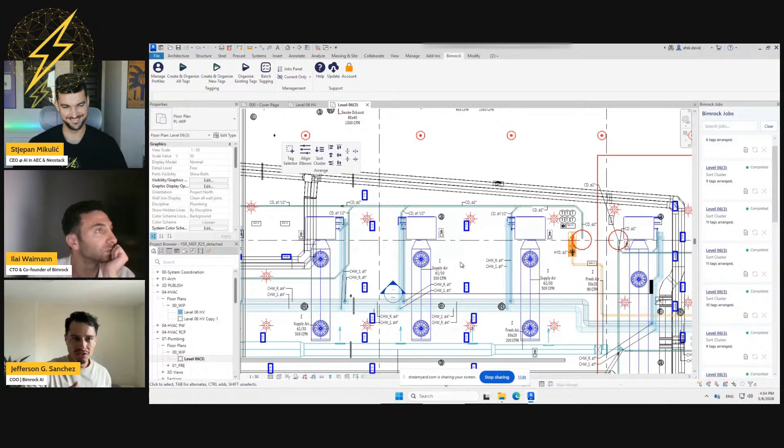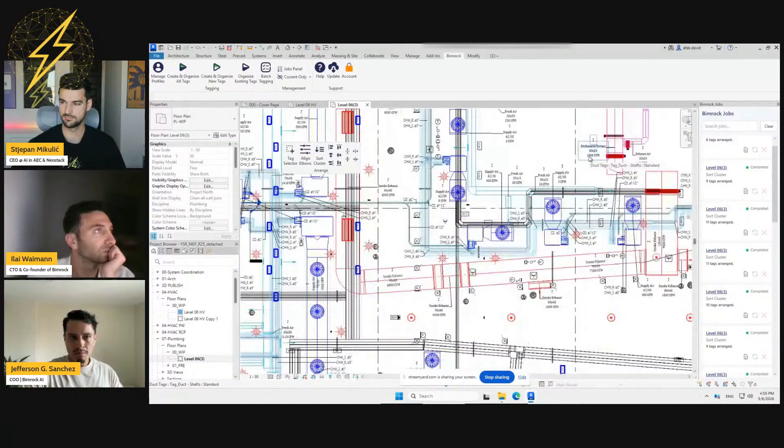And then as a segue, there are other versions of how this data feeds tools that are in the pipeline. So AI and LLMs for rapid design, or the idea of sketching something or communicating intent and then generating that. We're very sensitive to the needs of a particular client, and only if they want a solution that actually has access to their data, is on-premise, goes through a secure IT, legal, and procurement process, can we customize it, but that's an opt-in, a feature set where we are choosing to engage in a deeper partnership to customize things specifically for you and your firm.

But as a categorical, do we train on your data? We can say no. We just use the information that is minimally needed to deliver the result, and you get to choose how you engage with us. Okay, that's nice. Thank you so much for explaining that, Jefferson.

I just wanted to say I really love hosting these shows because I get to meet founders like you. And when I see how Ilai is looking at these drawings and this Revit model so passionately, about tags and stuff, I'm like... Yeah. No, if only my friends at home knew how passionate I am about tagging. If only they would stop talking to me.

Yeah. Okay, I have two quick questions that I want to get within 3 minutes because I want to be respectful of people who need to jump at the full hour. One, is this it from Bimrock today? And it's fine if it is. I'm just wanting to learn what's your next step, what's the roadmap, what are you working on, and so on.

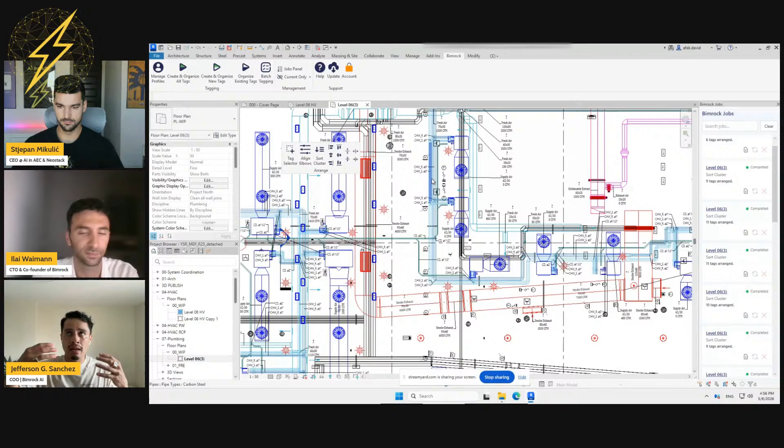Yeah. So the roadmap operates on this philosophy, like we're a Figma plus Cursor for the MEP industry, and that boils down to two things. You can design things with intent, with the ability to edit and understand all of the judgment that went into the decision. So we're not a black box autonomous solution, but we chose to start with documentation because documentation is the one recurring thing at a handoff process for any company.

And at the end of the day, it helps us begin a relationship, go through procurement, through IT into legal, and just basically sell and partner with you. But that's a means to an end that delivers value today on the path to a larger rapid design or generative design platform. So this is effectively the sticky notes. The next version that we're releasing in private beta with a couple of customers is like the Figma sketch to design, or intent to design. That's done automatically. But for all intents and purposes, AutoTag is the tool that we have right now.

If you're interested in a lot of the other cool stuff and the passion and the nitpickiness that we address for software design, and assuming that we carry that philosophy over to the rest of the products, please talk to us. But yeah, AutoTag is a documentation tool on the path to iterative and generative design as a category of tools.

Okay, very nice. For people who are interested in starting with you, what's the best way, and how much does it cost, and are you in the phase of working only with partners? Are you open for people just to download the app and work with it? How does it work? We went through the tedious process of getting launched on the Autodesk App Store. So AutoTag itself, you can download it. All the commercial terms of service are actually there. We've only been out for a week and we're already having a couple of downloads, so we really appreciate it.